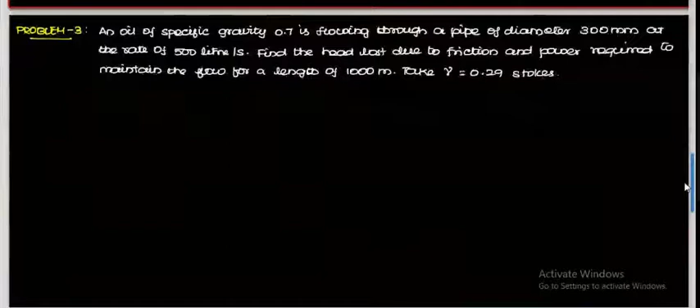Listen, an oil of specific gravity 0.7 is flowing through a pipe of diameter 300 mm at the rate of

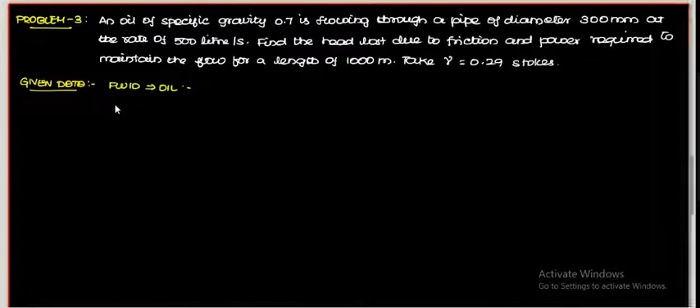Given data: in this problem the fluid is oil. Now oil specific gravity is given as 0.7. So you can determine the density of the oil. Rho of oil equals specific gravity into density of water 1000. So you get 700 kilogram per meter cube. Diameter of the pipe is given as 300 mm, that is equal to 0.3 meter.

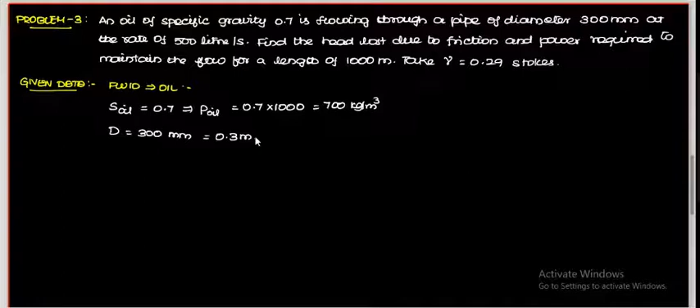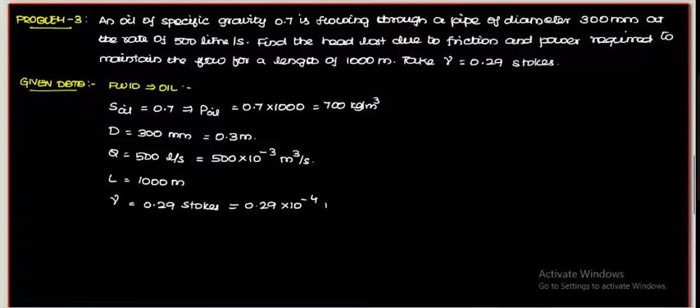Flow rate Q equals 500 liter per second, that is 500 into 10 power minus 3 meter cube per second. Length of the pipe equals 1000 meter and kinematic viscosity nu equals 0.29 Stokes. Convert Stokes into meter square per second: 0.29 into 10 power minus 4 meter square per second. To find: first, head loss due to friction HF, and second, power. Okay, solution.

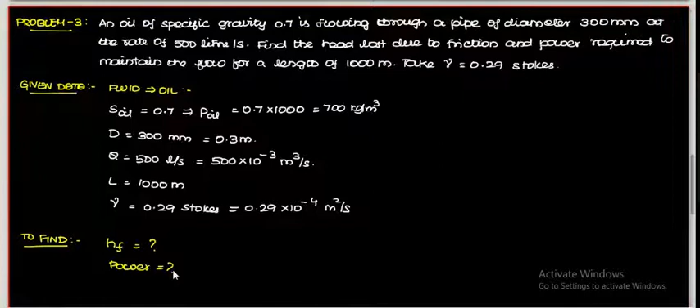According to Darcy-Weisbach equation, HF equals 4fLV square divided by 2gD. And another one, power. New formula: power P equals rho g Q into HF divided by 1000, in terms of kilowatts. This is the formula used in this problem. Now we go to solution. Step 1.

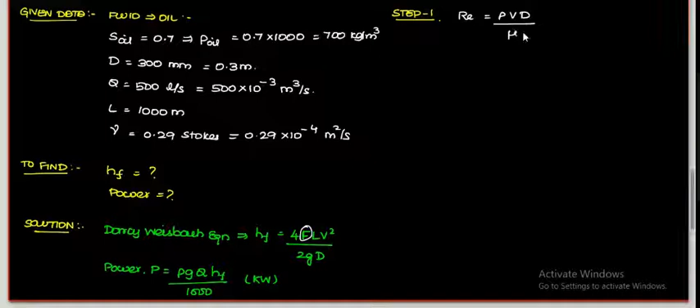Step 1. In order to calculate HF, you have to determine the coefficient of friction f, whether it is laminar or turbulent flow. Reynolds number equals rho V D divided by mu. Here mu is not given, only kinematic viscosity, so take the formula as VD by kinematic viscosity. Velocity is not given, so calculate velocity first by continuity equation.

Q equals AV, therefore V equals Q by A. Q is 500 into 10 power minus 3 meter cube per second divided by area pi by 4 D square, D is 0.3. So velocity is 7.073 meter per second. Then Reynolds number Re equals VD by nu: 7.073 into 0.3 divided by 0.29 into 10 power minus 4. So Reynolds number is 7.316 into 10 power 4.

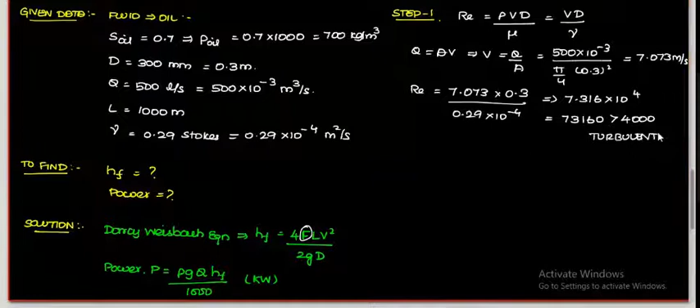Same as previous problem. That is 73160, greater than 4000, so the flow is turbulent. The only difference is power is to be calculated in this problem. Step 2: for turbulent flow, coefficient of friction f is 0.079 divided by Reynolds number power 1/4. Substitute 0.079 divided by 73,160 power 0.25, you get f as 0.0048.

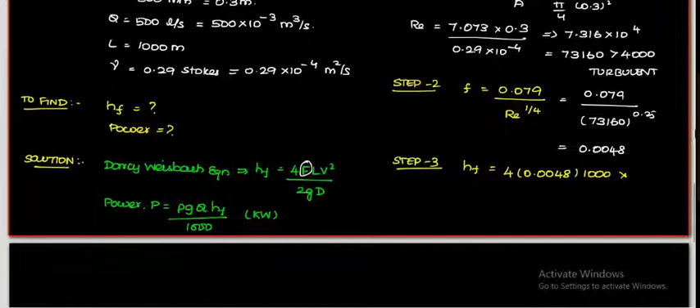Now step 3, HF equals 4f LV square: 4 into 0.0048 into L, 1000 meter, into 7.073 whole square, divided by 2 into g 9.81 into D 0.3 meter. So you get HF equal to 163.18 meter. Okay, and the last step, power.

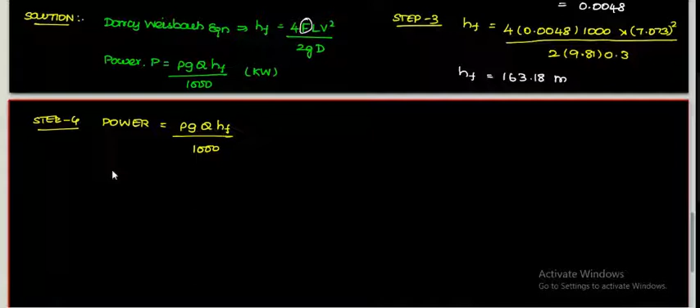Listen carefully. Step 4, determine the power. Power is rho g Q into HF divided by 1000, in kilowatts. So what is rho? Rho is mass density. We calculated the mass density of the oil as 700 kilogram per meter cube.

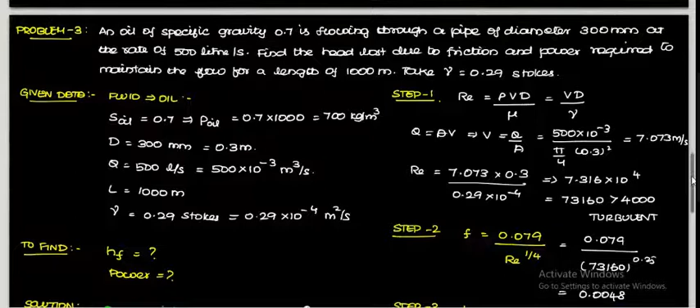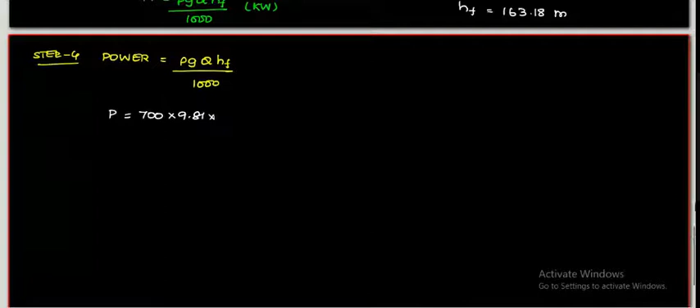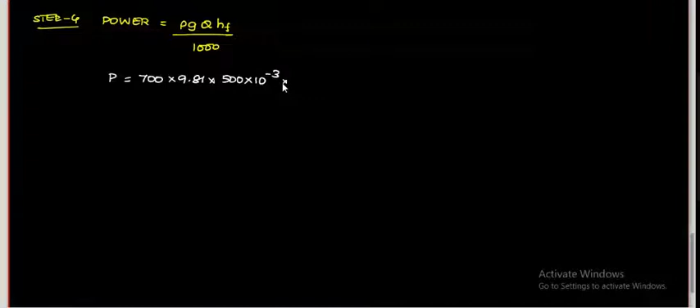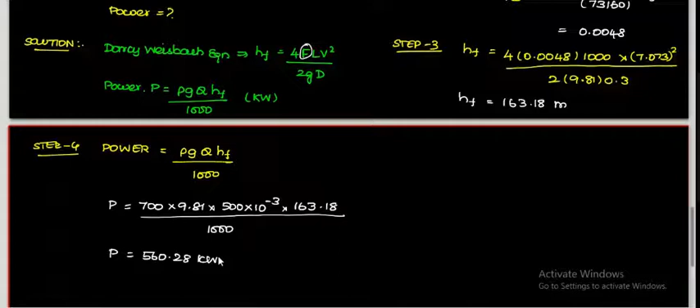So 700 into g 9.81 into Q, the discharge, 500 liter per second, that is 500 into 10 power minus 3 meter cube per second, into HF, head loss due to friction, which we calculated as 163.18 meter, divided by 1000. So power is 560.28 kilowatts. This is the required answer using Darcy-Weisbach equation. If you have any doubt, you can ask me.